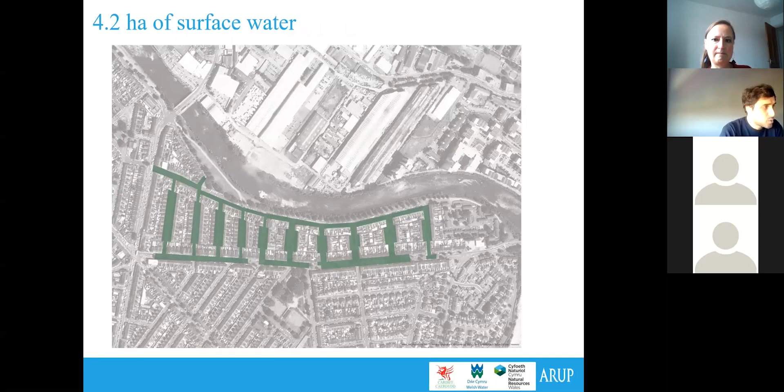Grangetown, for those who don't know it, is basically a ward within Cardiff Council at the southwest end of the council, as you see on the screen. There are about 20,000 residents, and the area we're looking at is about 550 properties, 12 streets, and we have about 4.2 hectares of surface water, excluding roofs, because we're not counting the water that comes from roofs. If you put that on top, it'll be even more.

So what is the problem, and how did this start? It started from a resident and a local councillor who realized that Grangetown is very close to the River Taff, and at the moment all the surface water is conveyed into the sewers, pumped 8 miles away to the Barry wastewater treatment works through 2 pumping stations, then treated at Barry and pumped again into the sea. There's a lot of energy spent pumping the water, which isn't very efficient. That's unsustainable drainage, and that's how the project started.

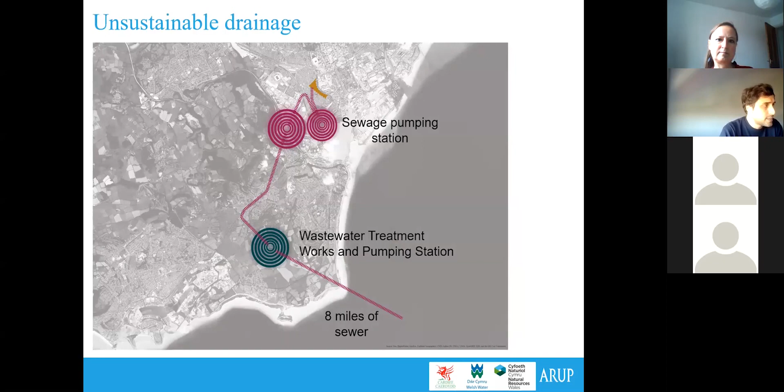What are the key drivers? There are 3 main ones. Regeneration is one: making a more attractive urban landscape, community cohesion, health and well-being, safer public areas, and placemaking. Then there's green space and trees, making a space that's good for habitat creation, climate control, and improved air quality. And all of this, as I mentioned, started as a water management issue, so that's one of the key drivers as well.

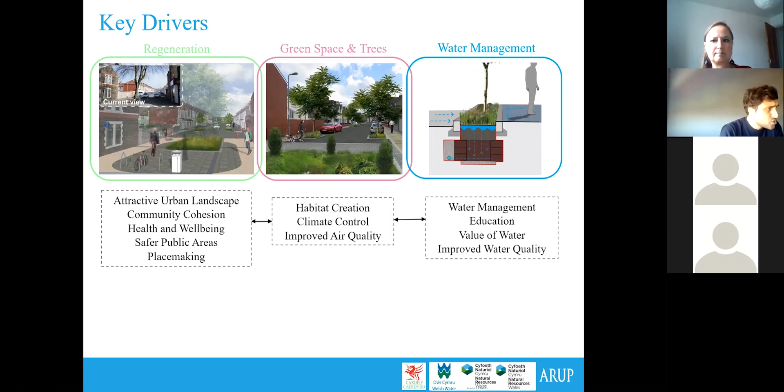The water management element encompasses different aspects. One is pure hydraulics, but then there's also education, educating people about water, its importance, its value, and how surface water quality can be improved locally right at the site, rather than pumping and treating it far away. So these are the 3 main key drivers, and we have 3 main key partners on this project.

One is the local authority, Cardiff Council, which is also the highway authority and lead local flood authority, and they kick-started this project. But to deliver it, they had to partner with the water company, Welsh Water, because they're also the sewerage undertaker. They own the sewers, so it's their asset. If you want to do anything on sewage pipes, you need Welsh Water's permission. Having them as a partner means they're on board, and you don't have to fight for things.

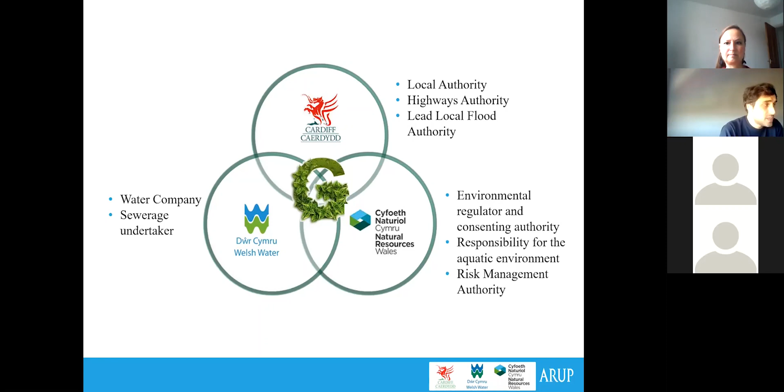Natural Resources Wales is the environmental regulator and consenting authority, the equivalent of the Environment Agency in England but just for Wales. They're responsible for the aquatic environment and act as the risk management authority as well. So these are the main partners.

In terms of the design process and integration, this has been a truly multidisciplinary project involving many different disciplines. We were appointed as lead consultants and designers, Arup, and within Arup we had to use different disciplines. Water engineering and landscape architecture were the main two. I worked hand in hand with my colleague Chris Ellis, the water engineer on the project, while I was the landscape lead. We also consulted with other disciplines like transport, highways, structural engineering, and geotechnical.

Together with the three main partners, we had other stakeholders, Sustrans being one of the main ones, plus community funding resources and residents. Obviously the most important stakeholder in any project is always residents, and the police, just to name a few.

So what is the vision? The vision was to make Green Grangetown an exemplary scheme for sustainable drainage in Cardiff, Wales, and beyond. It was a pilot to encourage greater partnership with the public, private, and third sectors, combining both their expertise and funding.

The partners I talked about earlier were partners, but also funders. They had funding available to deliver these projects, and the funding came from the three partners together.

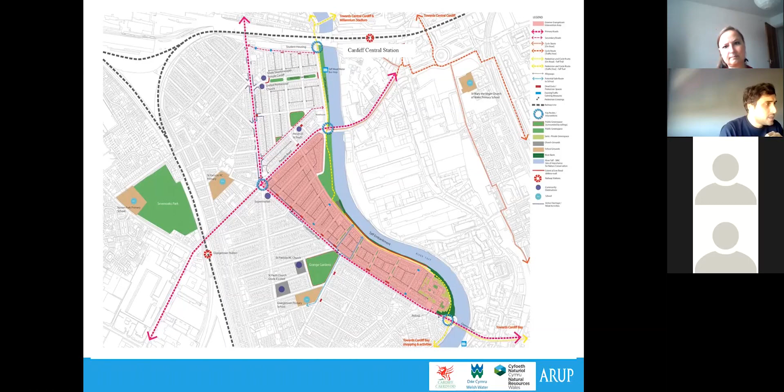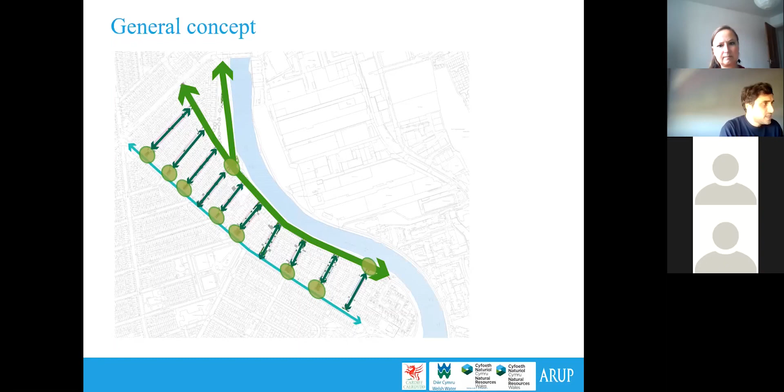From that, you start with the general concept, which is about greening the site, but there are different elements and geometries. We have some very wide streets, but some much narrower ones. We have some very long corridors, and some much smaller streets. We have dead ends, and through streets. All of that has to be embedded into the concept.

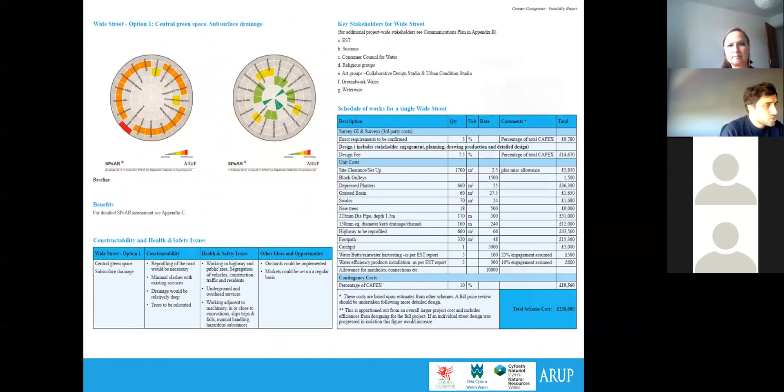Through the feasibility study, there was a lot of hydraulic modeling and costing, and we also did SPeAR analysis, which is an Arup in-house tool for sustainability analysis. We did these studies for each of the options, since we have different types of options for each street. Another option would be to have the rain gardens on the sides rather than in the middle. So those options were analyzed.

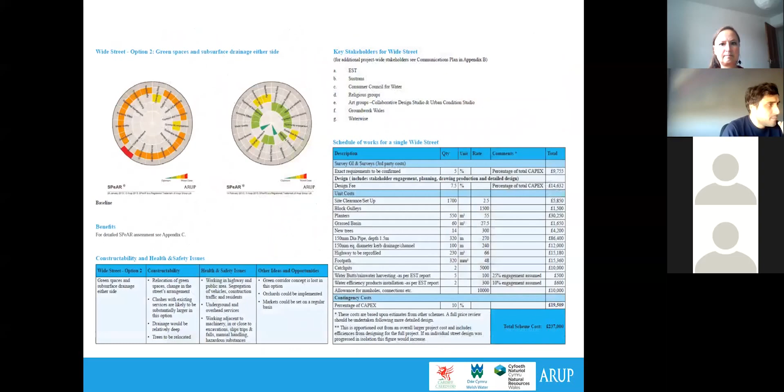What's interesting about the feasibility study is that they soon found out this option was not feasible, because the current camber of the road meant water was draining towards the sides of the road. To make water drain naturally through gravity to the middle, you'd have to change the camber of the road, which would mean a lot of digging. These streets are Victorian, so they're very old and have a lot of old services underneath that you don't want to disturb too much, otherwise you'll cause a lot of potential problems. So this option was quickly identified as not viable, not feasible.

That's why it's so important to produce feasibility studies and not just jump straight into one idea. You need to test what is possible first.

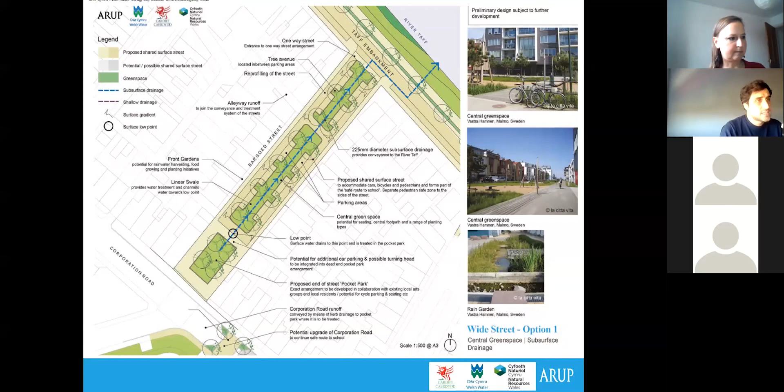So if we go into the challenges now, some of the main challenges on the site. In this presentation there's obviously a lot of slides about landscape, but also a lot about engineering. This presentation is one I used to do with my colleague Chris, who is an engineer, so he would describe these things. I'll just touch base on those, but I'm not an engineer, so I probably don't have as much knowledge as an engineer would.

These are very sensitive infrastructure. It has happened in the past that due to works, some of these brick egg sewers have been disturbed, causing a lot of problems and costing the water authority a lot of money to repair. You don't really want to break any of these because it could cause major problems. So this was one of the constraints - providing a drainage system meant we had to dig very close to this existing infrastructure, which is a problem.

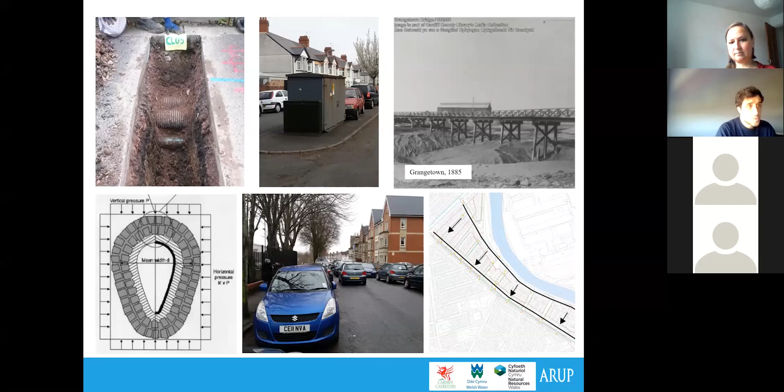Another challenge is the geometry. As you can see, we have different geometries - some narrow streets, as narrow as 8 meters, with traffic going in and out, so you have to work with that, and it's quite challenging. Then we have other streets that are much wider and much easier to work with, and that's something we think about in design, because these are the streets where we can maximize benefits.

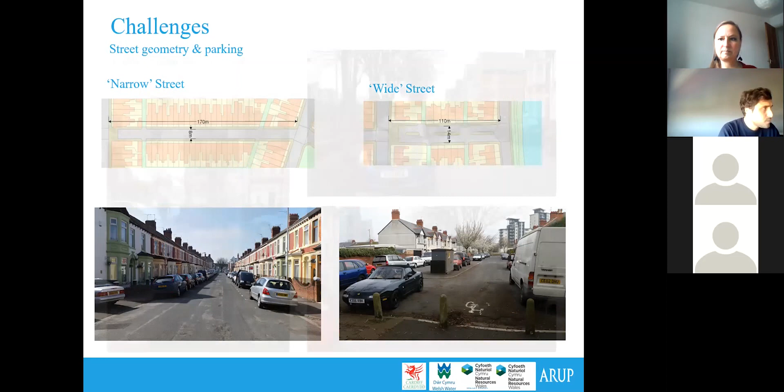Other challenges we found were parking. Back in the day, everyone thought parking was an issue - there wasn't enough, but it was also an issue because people were parking all over the place and causing health and safety issues. As you can see here, a disabled person has to go on the road with the risk that entails, because traffic management wasn't great at the time.

So that was something we had in mind, not just the traffic management, but also the perception of people of not having enough parking was very important. I'll talk about that later.

As you can see, existing infrastructure wasn't very great. A lot of it was damaged. A lot of the trees were not in the best condition around the pavements, because they were planted back in the day on a very small tree pit, without any thought about how much those roots would extend. What happens is the tree becomes an issue for pedestrians, cyclists, and disabled people trying to walk across these footpaths. So that was a main challenge we identified.

Then the topography — we have to understand that sustainable drainage is based on gravity, so we're trying to reduce the expense on energy consumption of the pumping stations by using the energy we have for free, through gravity. With water drainage, when you have a good difference in level, it's easy to work because you can move water from a higher spot to a lower spot. That's easy. But when it's very flat, it's much more difficult and challenging.

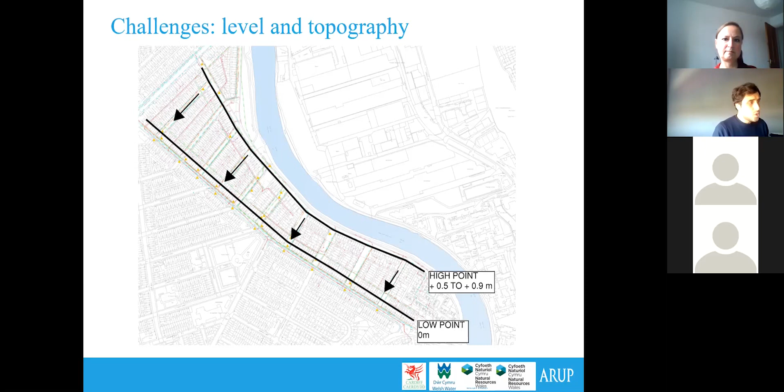And this is what happened in Grangetown. It's a very flat area. As you can see here, from high point to low point, in some places it's only half a meter. So making sure that you move water at the velocities needed for the hydraulic model to work was something we knew was going to be challenging.

But as well as challenges, there are a lot of opportunities, and we always thought the opportunities are providing a lot of multi-benefits. I think this is one of the things I probably contributed the most, because originally this project was conceived as purely sustainable drainage. But then when landscape came along, we started unveiling and identifying opportunities for other benefits that maybe weren't thought of or identified before.

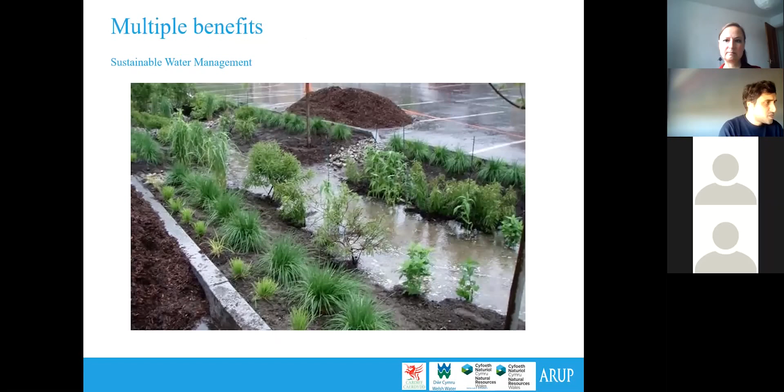So we've talked about sustainable water management, but then again, this is the hectares of impermeable surface that we are removing from the site.

Placemaking obviously is an obvious one at the time. Grangetown maybe was lacking a bit of placemaking — the spaces were not very well laid out or suited for community engagement and amenity. So we thought there was a huge opportunity to make the spaces better for the public, and placemaking was an obvious one.

Water and air quality — again, we knew we could improve water quality, but then by having more trees and planting, we knew air quality was another benefit as well.

Health and well-being, an obvious one. There's a lot of research — at the time there wasn't that much, but nowadays there's a lot of research that tells you that having a green space near your house, or even seeing greenery from your window, will improve your health and well-being, especially in terms of mental well-being. That was another thing very much lacking in this area of Cardiff, so health and well-being was a big one.

Ecology and biodiversity — again, we always thought of that as very important. I'll talk about that later, but pollinators, creating habitat for insects, creating smaller spots that could bring more biodiversity to the site. It's not just through pollinators, but trying to use plant species that are native, but that could also bring added value to biodiversity.

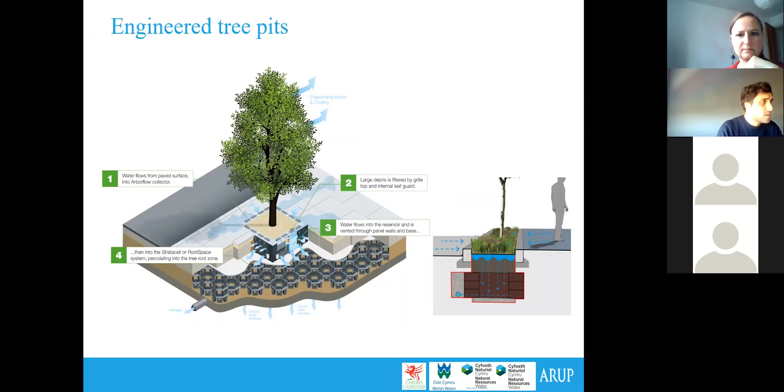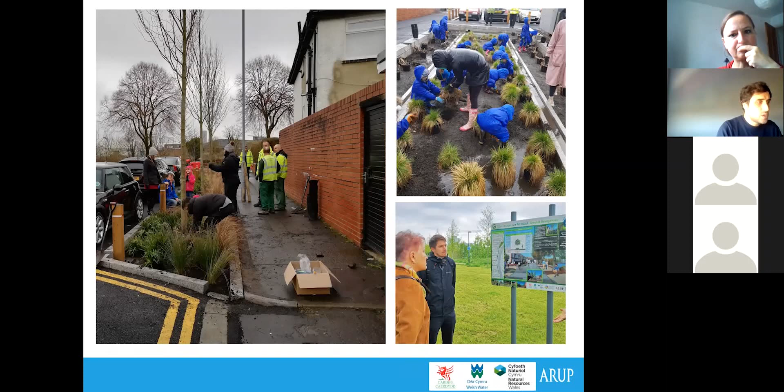The wall is a rain garden. As part of the community engagement, we had planting days where we brought residents, the public, and even schools to come along and plant. We had days showing boards about the scheme, and used a lot of graphics to try to show people what we were trying to do. These are just some examples, I'll go through them quickly.

Going back to the design, as I showed earlier, we started with a feasibility study and then completely detoured from that. We had different options to test, some much more rigid and linear, some more organic. We took these options to the public, ran them through different stakeholders, got feedback from everyone, and refined those options in various stages to reach an option that dealt with all the different constraints.

One major constraint was parking. We had to hit a specific number of parking spots, otherwise residents wouldn't be happy since their perception was that they were losing all the parking. So working around parking and making sure access for cars was embedded was very important, using vehicle tracking to ensure cars could go in and out without problems. Another challenging element was convincing traffic engineers to change their highways standards, since those standards are quite constrained about what you can and can't do.

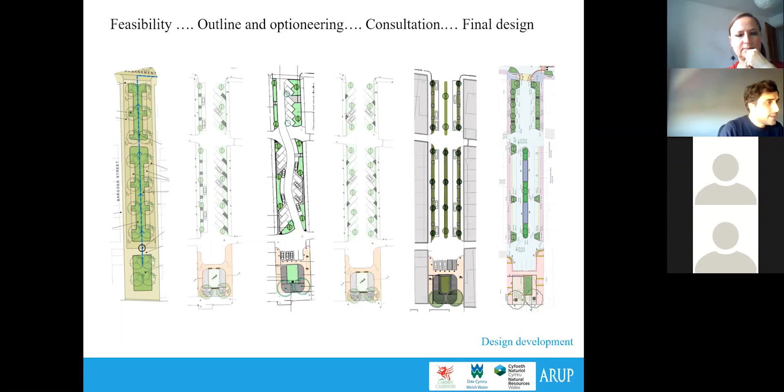We convinced them to relax some of those constraints because it was worth it in these scenarios. This image shows the preferred option, taking rain gardens to the sides while making sure that where properties front the street, there's enough parking for each property. But where properties back onto the street without an entrance, like in those two corners, you can have much larger rain gardens.

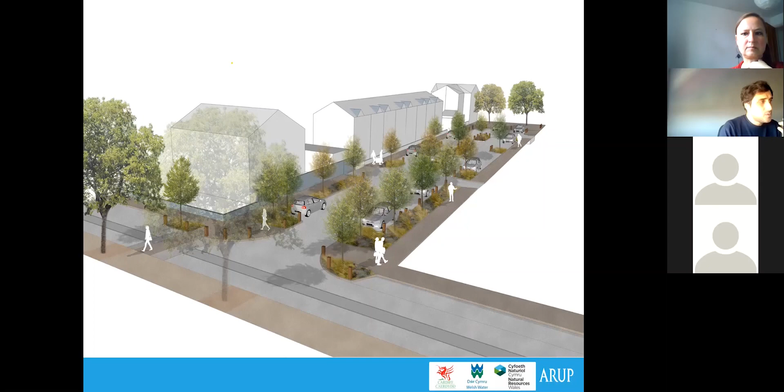So as I mentioned, this preferred option is based on the existing camber of the road. The camber makes the water go from a high point in the middle towards the sides, which means we didn't have to dig the whole road. That was very important in terms of cost saving and making sure the project was viable.

So that's why we ended up with this preferred option. This is showing that in a bit more detail. Where we were fronting properties, we tried to optimize the rain garden space but also keep a number of parking, including disabled parking, since some properties have disabled bays we had to keep. That's why we probably didn't have a rain garden here, for instance, but then we have much larger areas of rain gardens where we didn't have properties fronting.

Another element, as I mentioned earlier, is the layout of these streets — they came through much wider. So one of the things we tried to do was reduce traffic speeds to make it safer for pedestrians and cyclists. What we did is tighten the geometry of the streets. Making it tighter means cars will go slower and be more aware of what's happening, because they know they have a constrained space.

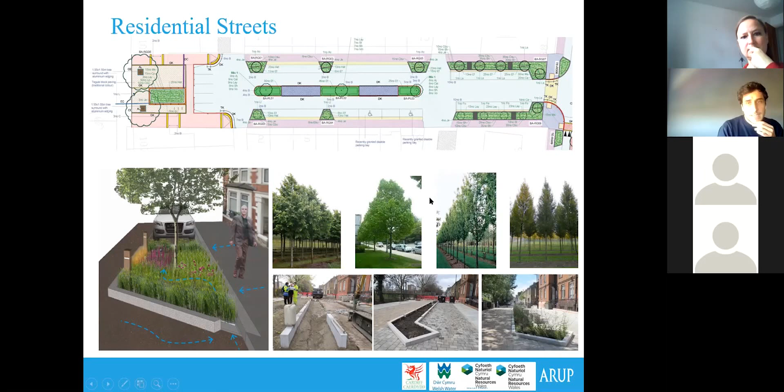But we thought there was a huge opportunity for placemaking in these dead end areas — spaces for people to gather. At the moment they were quite grey, without any real facilities, and we thought let's give something to people here, not just greenery, but spaces where they could sit, gather around, park their bikes, etc. But again, keep the facility of sustainable drainage by having very large rain gardens that convey water from large areas of impermeable surface.

As an example, one of the challenges we faced is sometimes people don't want amenities in their streets because they think they attract antisocial behavior. So we had to work with the public, convincing them that if you make a place nicer, it will change attitudes, and people will start behaving much better, giving them better possibilities to develop.

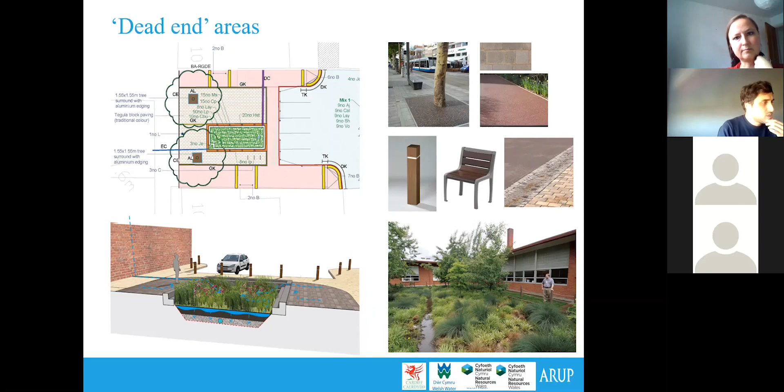So this was just a drawing showing those dead ends.

And then we have the Taff Embankment as one of the main key areas. The Taff Embankment runs along the Taff Trail. It's part of a national cycle route, but also part of the most used long distance footpath in Wales, which takes you from up in the Brecon Beacons all the way down to the bay. This is a very important route for community users on weekends for recreation, but also very important for commuters from all over Cardiff who go through this route to get to the bay to work.

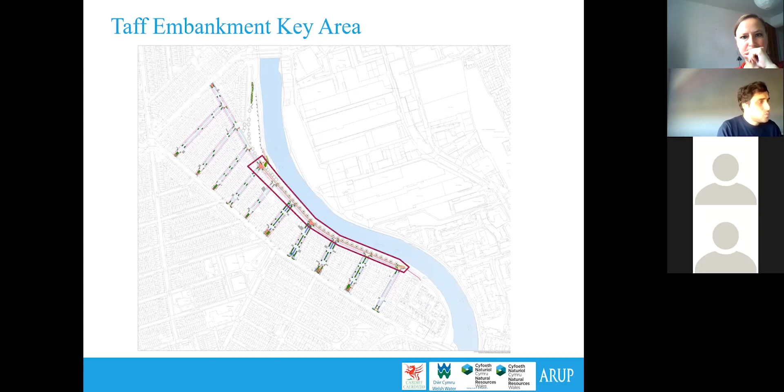We knew that route was not doing justice to its importance, because it was full of cars parked on both sides. The pavements weren't great, there wasn't full inclusivity, so there were a lot of issues, and we knew we had to challenge that and change it.

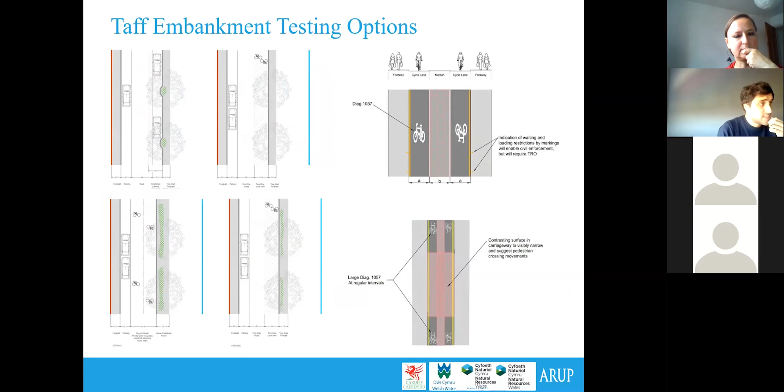This kind of example is based on similar projects and concepts done a lot in Holland and Denmark. It wasn't done in Wales yet, but through a lot of testing we managed to convince the client, and also the public, that this was the right solution.

That was about parking. We had to show how that looked to convince people, so that was a graphic showing the before and after of what that means.

Another important thing: we had a footpath along the Taff Embankment with a curb running adjacent to tree trunks. It was very constrained, but we knew we had to give infrastructure for pedestrians and disabled people as well as cyclists. Our solution was to extend the pavement and raise it to hide the level issues and the problems around the tree roots, leveling the whole surface.

We used a special surface called KBI Flexi-Pave, which is fully permeable, allowing water to filter through and give local water to those trees, which they didn't have before since it was just fully tarmac. That was the solution we came up with.

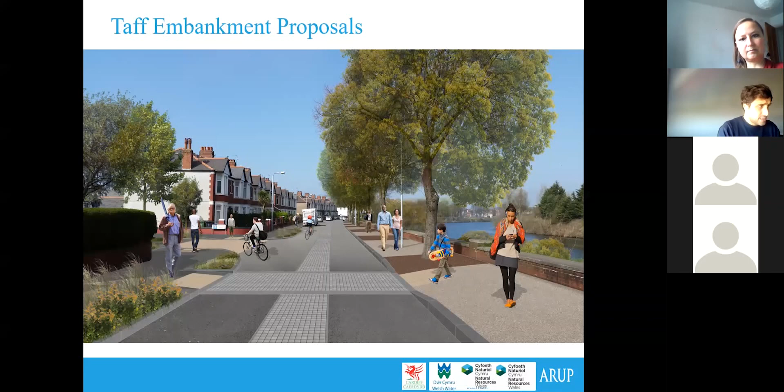We also wanted to make this space feel as pedestrian-friendly as possible. To do that we had to provide more crossings, since at the moment there weren't many, so crossings and dealing with junctions was also a very important side.

This is an example of how we dealt with a junction. We got advice from transport, because you have to accommodate vehicles, pedestrians, and cyclists, including cyclists transitioning from off-street cycling to on-street cycling. That transition is quite important.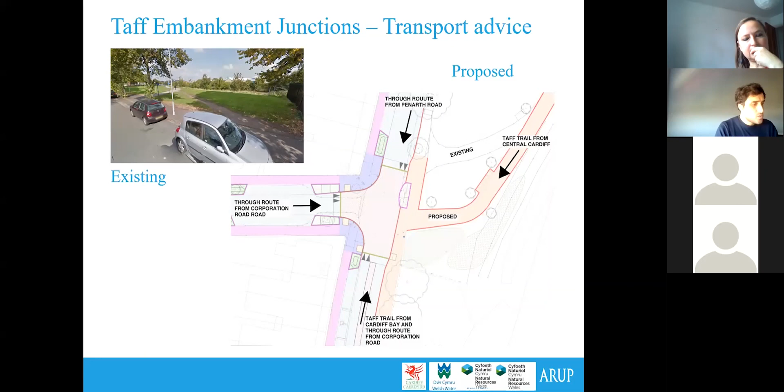Rather than a smooth transition, we were advised to have a more 90-degree transition for health and safety, to make sure cyclists stop and look before getting onto the road. This shows how we had to integrate and get advice from other disciplines to make sure the project was fully integrated.

Fully coordinated. Planting design was a very long process. We started by doing a planting selection using a software called Plant Partner.

I'm not sure if it's free, but it's not very expensive. Basically, the software allows you to select planting based on different parameters like resilience, hardiness, water consumption, and suitability for every environment. You have all these different parameters, so we started selecting planting based on what we needed for this scheme.

We knew we wanted biodiversity value, so we chose species with high biodiversity value that were good for bees and pollinators. We knew rain gardens are quite special environments because a lot of people think rain gardens are very humid and have a lot of water, but actually they're designed to drain very quickly because the soil media is very sandy, not standard topsoil.

What we specified is a very sandy type of soil that makes water filter through quickly, and because of that they dry very quickly, so in summer they could be very dry. The planting you select has to do well in both wet and dry environments, which was quite challenging because there aren't a lot of plants able to do that.

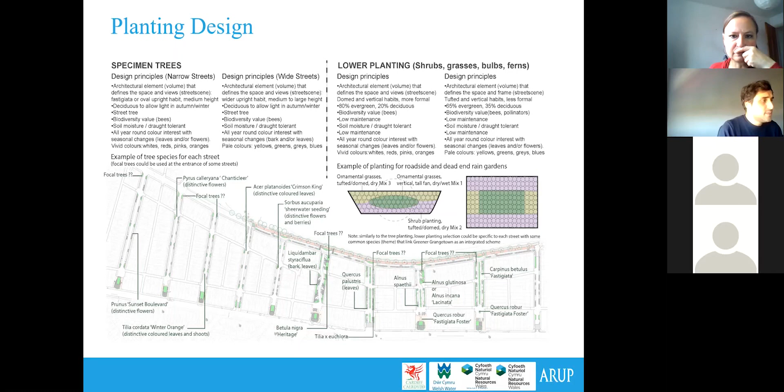So I guess here what we show is there's two main elements to this project: one is what is above ground, what you see, and the other one is what is below ground. A lot of people don't see what's below ground.

Below ground is a series of pipes that basically connect the water. The water drains from the road and the pavements into these rain gardens through gravity. Then from the rain gardens it goes into a central pipe that takes the water down into another pipe and then into an outfall to the river. So that is something that the public may not perceive, so we have to explain that and show it with graphics.

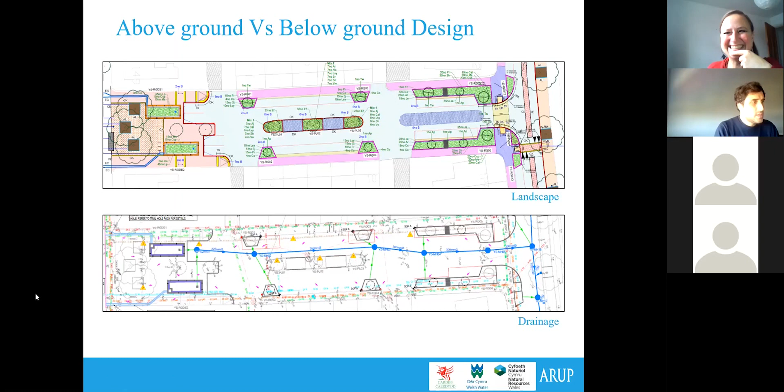The brick sewer - how we overcame this problem, because we had to put drainage through a street that had a brick sewer. To do that, our drainage engineers created a siphon, basically a pipe that goes underneath the brick sewer. Building this without touching the brick sewer was very, very challenging. They had to create a very specific construction method to make sure the brick exterior wasn't affected.

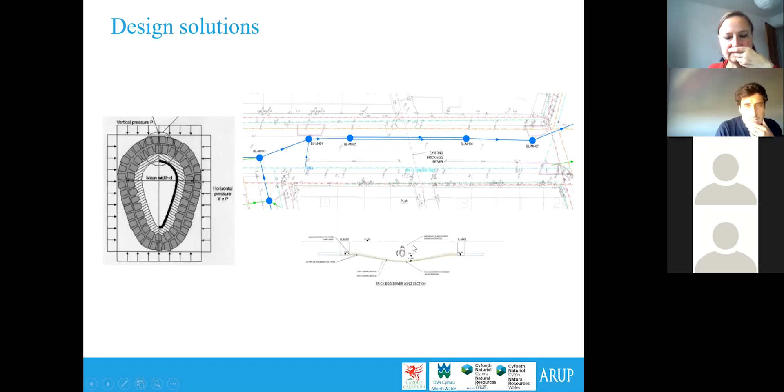Construction details - I'm not going to go into a lot of detail, but we had to go through detailing everything, because what we did is produce a package of detailed drawings and hand it over to the contractor. The contractor then takes those and builds them. So you have to give them enough information so they don't come back with a lot of questions, or do something that you don't want them to do.

So this is an example of a dead-end rain garden and how it works. Basically it has an inlet which distributes the water through gravity in a kind of level channel. Then from the channel it's got different inserts that make the water spread through the planting, because one of the main problems with rain gardens is a lot of the times you get water getting into the inlet and most of the water stays there.

That creates a problem by making an area with a lot of water and moisture and a lot of scouring, and then the water may not reach the other parts of the rain garden. So we had to make sure the water reaches the whole rain garden. To do that we created this channel, a kind of deep channel solution. Again it has an underpipe, an underground pipe where the water will filter through, get into the pipe, and out into that main pipe that runs through the middle of the scheme.

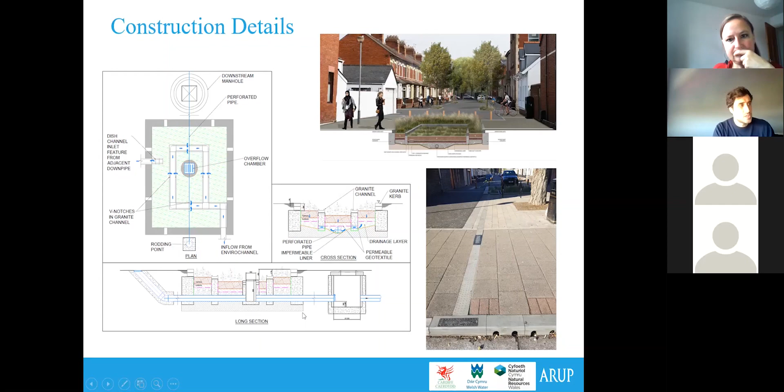But you have to also think about maintenance - what happens if one of these pipes blocks? That's where you build something like this: a rodding point. It means it's an area where you can access the pipe with a rodding, a cable, to clean it in case it gets blocked. So maintenance is something very important to think about beforehand through your design.

More construction details. Very importantly on this project, one of the main things we did probably differently from most landscape projects to date at the time in Cardiff was making sure each tree will have enough soil to establish, but also live through all the life expectancy of that tree - 25, 50 years - and be very healthy with enough soil volume. For that we established a minimum soil volume per tree, typically around 12 cubic meters.

And basically what happens is, like in some areas, as you would imagine on the streets, if you have a very large rain garden, you might have that volume.

In some of the smaller ones, you don't have that volume. So you have to make sure the tree can access that volume underneath the highway and the pavement. To do that, you have to create a system with root cells that allow that to happen. Because if you plant a tree surrounded by compacted ground, the roots will find it difficult to go through, and eventually won't utilize that space. To utilize that space, you have to have uncompacted soil.

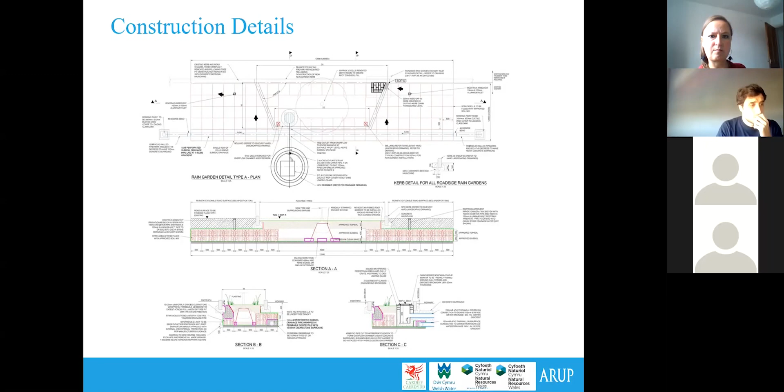Okay, so one thing - I think it's really interesting to understand this compromising of all the requirements. I guess what I was talking about is perhaps more possible when you have a bigger space where the water can stay there longer, and there's more time for these processes to occur. So it's very interesting to know what were the constraints of the project. Thank you. Oh, that's fine.

Okay, I'm not sure how I'm doing with time. Well, you are already over time, but it's okay as long as you can stay.

That's fine for us, take as much time as you want. Yeah, I'll just go quickly.

So again, that's the detail I'm showing here. In some cases we had to go over the rain gardens, and we came up with a non-standard solution of having a grate bridge. This is where you need to convince people, because it's not up to highway standards. So having this on the highway is by all means not standard. It was challenging to convince, but I think it ended up being a good solution, and people like it.

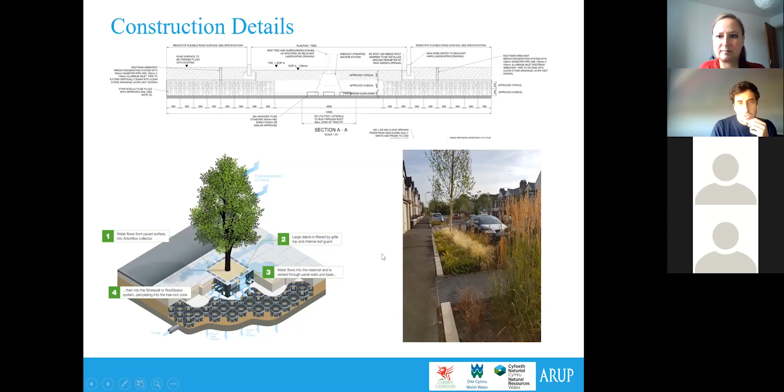Then they start laying the root cells, and the root cells in this case are from a company called Green Blue Urban. They're very well known in the UK for providing tree products. You can stack root cells as much as you want. These, I think, were 250 by 250 mil.

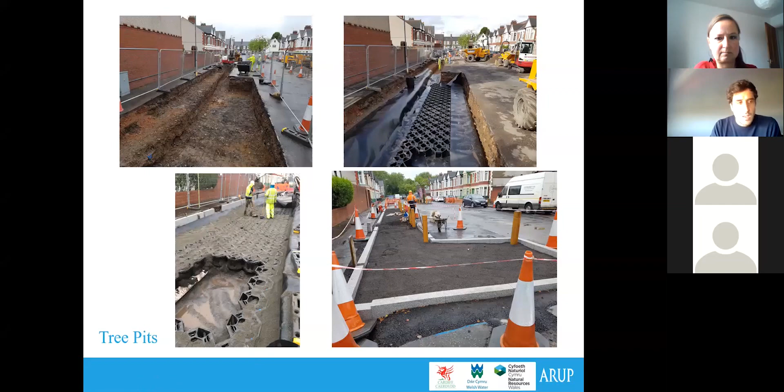Again, these are similar images showing how they install some other tree pits. A couple of things here: it's important to think about the root ball, because in some cases they realized the trees were too big to get into the tree pits, so there was a lot of work trying to make them fit.

The trees came with a root ball, as you can see. They're taken from the field, then get the root ball wrapped, and are planted with a guy system - basically a series of straps and a wire that goes down and anchors the tree on the ground. We thought this was the best solution, because you can also anchor trees with stakes, but the problem with stakes is that someone needs to go tighten them often. With this system, once it's anchored in the ground, you don't have to do anything, and it works much better for high winds or storms. We tested that with quite a few storms, and the trees didn't move, which was quite a good thing.

And here you can see the guy just walking through this rain garden, and that's the pipe you can see there - that's the overflow. It's almost like the equivalent of an overflow in a bathtub. When the water reaches a certain height, it goes directly into the overflow to make sure the water doesn't get into the road and cause problems.

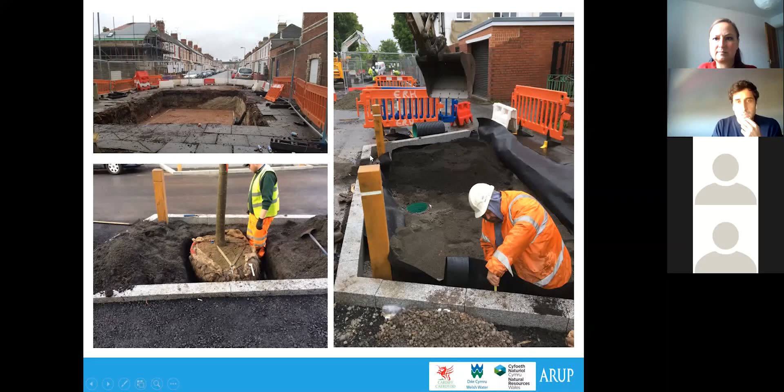This also shows the level of commitment we had with existing trees. There were quite a few existing trees, and some of them we managed to keep on some of the wider streets - you'll see that later in the photos, because they have sentimental value to people who planted them many years ago. So we worked our designs around that, but some of them were very difficult to keep, and this was one example.

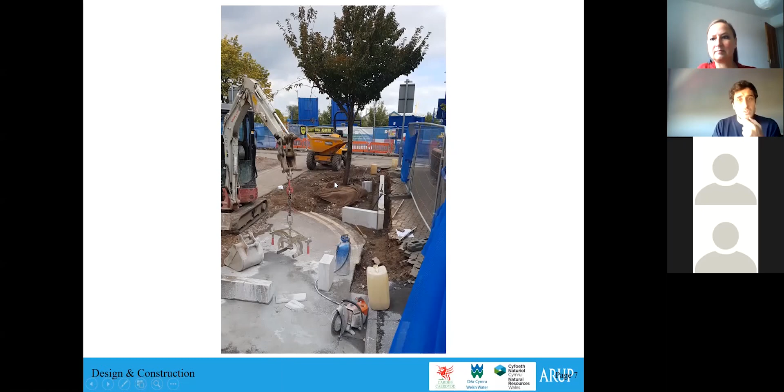What we did is transplant those trees. With some big cranes and machinery, the contractors were able to wrap the trees and move them to the park. It wasn't so much about efficiency - planting a new tree might be more efficient - but it was about saying to the public, look, we care about these trees, and we know they're important, and these things can be done. It's trying to win the public over, really.

Sustainability - this was done a bit retrospectively, but we started to look at how the UN SDGs relate to this project. As you know, there are 17 of them, so we knew this project could be very high on the delivery of these UN SDGs. We started identifying some of the obvious ones: good health and well-being, clean water and sanitation, industry and innovation and infrastructure.

Infrastructure - the main one, we created new infrastructure for cyclists, which will help the economy. Reduced inequality - I think it's a safer place, which will hopefully reduce those inequalities, and it's a place that may bring some more socioeconomic development. Sustainable cities and communities - again, making places more sustainable and engaging the community. Climate action - that's kind of an obvious one.

Life below water - that's more to do with the water that goes into rivers, and I'll show you some of that later, but the water that goes into the river is cleaner, at least for this specific area. So we hope that helps some of the river and marine biodiversity, life on land, and then partnerships for the goals - obviously we had to partner with different organizations to make this happen.

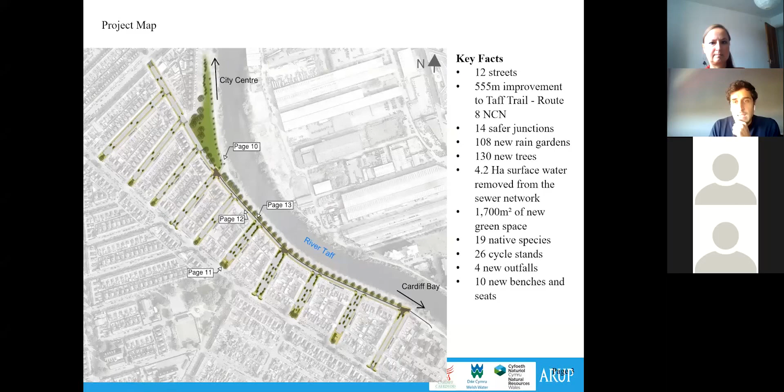Results and quantitative benefits so far - this is just some of the facts. As I said earlier: 12 streets, 555 meters of improved Taff Trail, route number 8 of the National Cycle Route, 14 safer junctions, 108 new rain gardens, 130 new trees included, removing 4.2 hectares of surface water from the sewer network, 1,700 new square meters of green space with 19 native species of trees, 26 new cycle stands, 4 new outfalls that go into the river, and 10 new benches and seats. That's some of the stats.

In terms of more quantitative data, this was research done by, I believe, Welsh Water. They did some baseline analysis, taking quite a lot of data before this project was built, and then some after. They are still working on this quite a lot, so we've only got some hints of their findings. This data is maybe two years old, or a year and a half, so I'm sure they have much more data now.

The economic impact on health was assessed as £4 million. I understand this is to do with the future reduction of people visiting doctors because they're more healthy. And again, amenity, potential cost and implication and benefit of 4 million because of more cyclists. We had cyclist counts, and the amount of cyclists now using the site as opposed to before is amazing, and those cyclists use it to get to work and for amenity, so that has an economic impact.

One quote is from Sustrans Wales, that's a very important one because it's to do with cycling infrastructure. Again, we didn't ask for these quotes, a lot of them were just put in papers that these organizations have done, so that's even better for us.

So, quotes from residents. And then I had an email the other day from a colleague, which for me is even better, saying she was in a course or presentation, and quite a lot of people were talking about Grangetown, raising how exemplary it was and how great it was for them, and how much it has made an impact on their lives. And that's what it's all about, making an impact on people's lives.